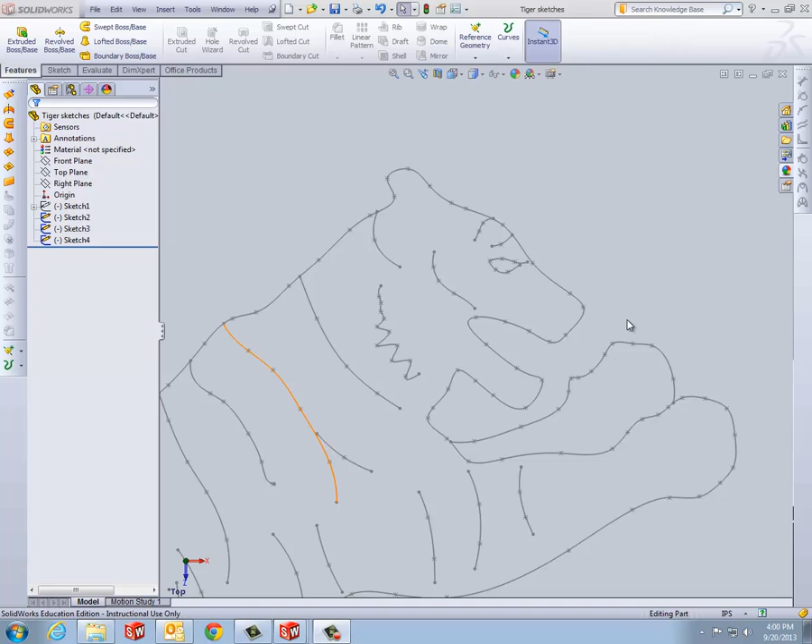Now that I've got a scary looking head on this tiger, I'd like to extrude this whole tiger body, but before I do, I'm going to do a few extra additional steps here. I want to extrude the main body out, probably 100 thou, but this background, his paw back here, I'd like to extrude about 30 thousandths.

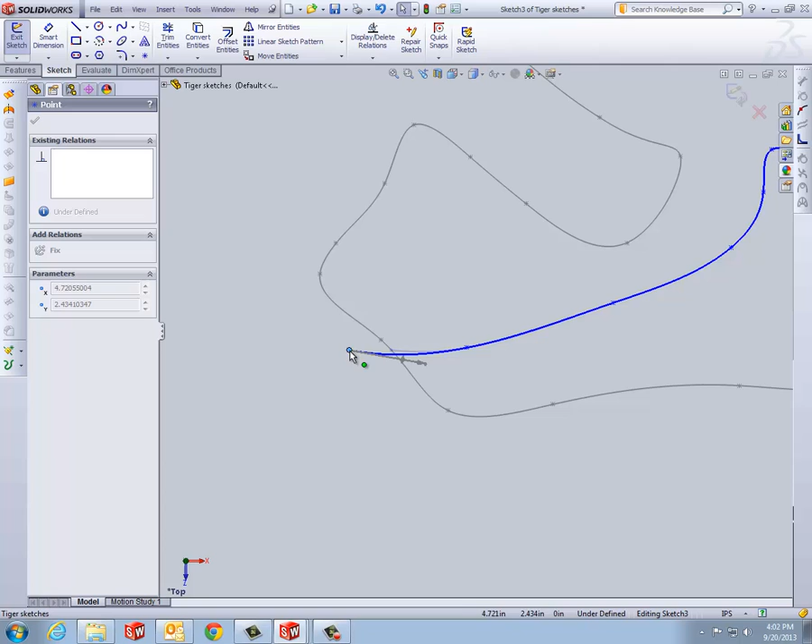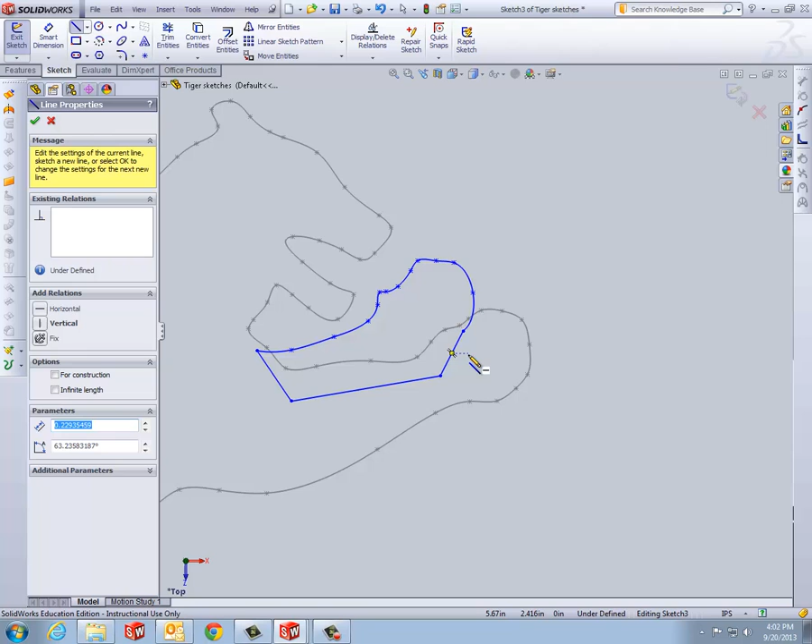So I'm going to tell it sketch 3, pull this in a little ways, pull this in a little ways, make sure I have a nice tight looking paw. I'll close that up, and over here, let's try it without pulling. I'm going to close that open loop also. Doesn't have to be pretty.

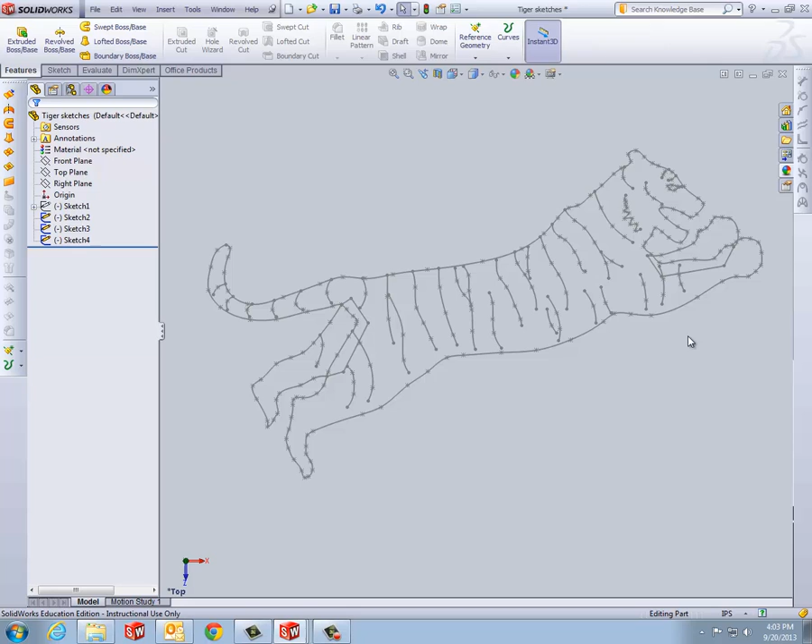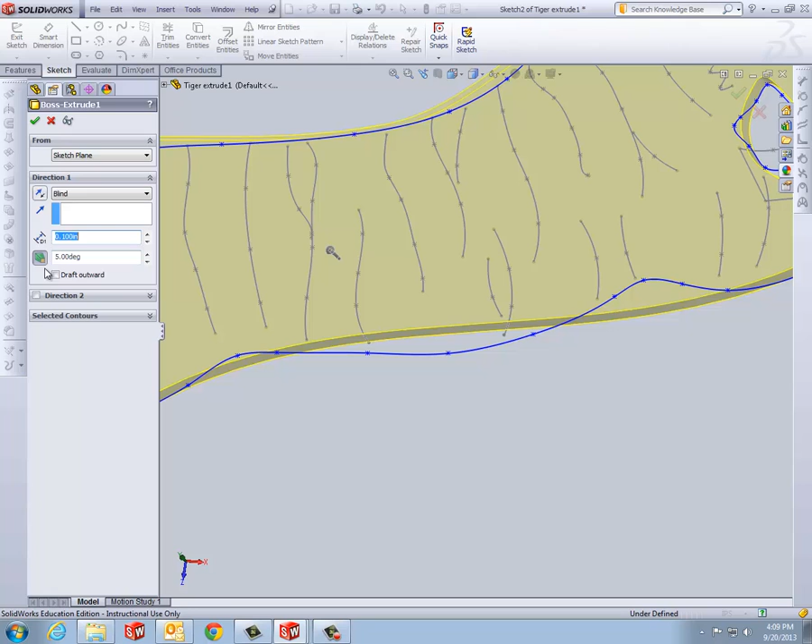Okay, now let's have some fun with this guy. I think we've done all our preliminary work that we need to do here. Let's take sketch 2 and come up to extruded boss base. Let's extrude him up - yeah, I like their suggestion of 100 thousandths. That's pretty good. So he's extruded out now 100 thousandths of an inch. So now I've got his head.

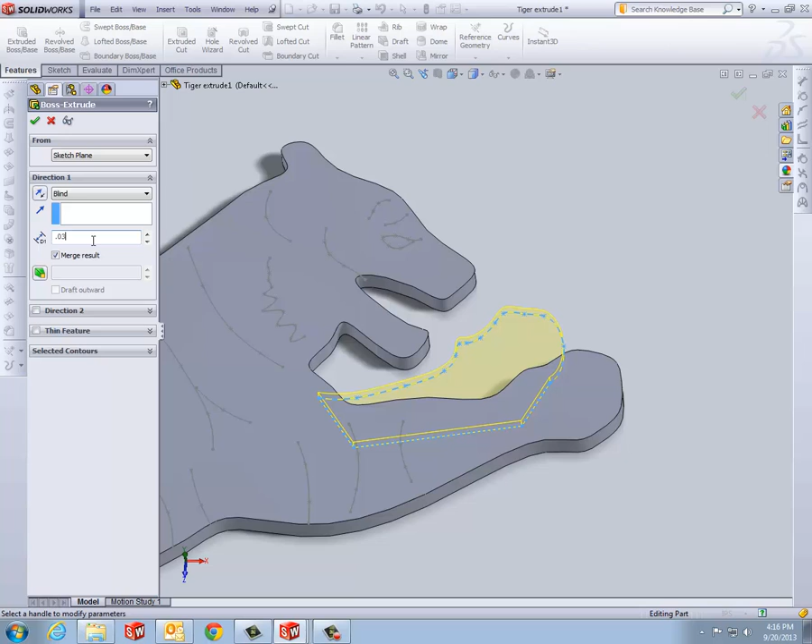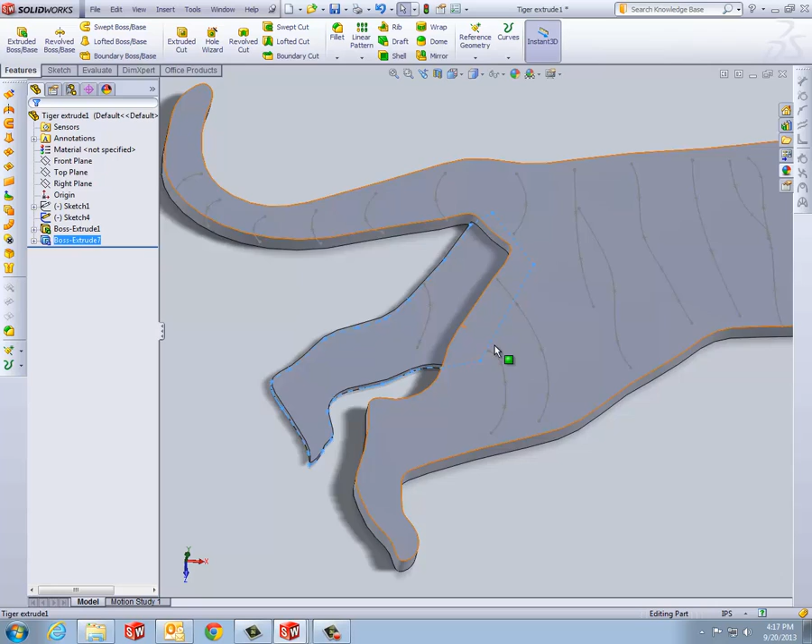Now let's extrude sketch 3, and I only want to extrude it about - not very much. If I extrude it very far, then I'm going to run into troubles later when I try to fillet this outside edge. So I've got it extruded. It's got some relief there. His rear leg is here, but it's definitely in the background.

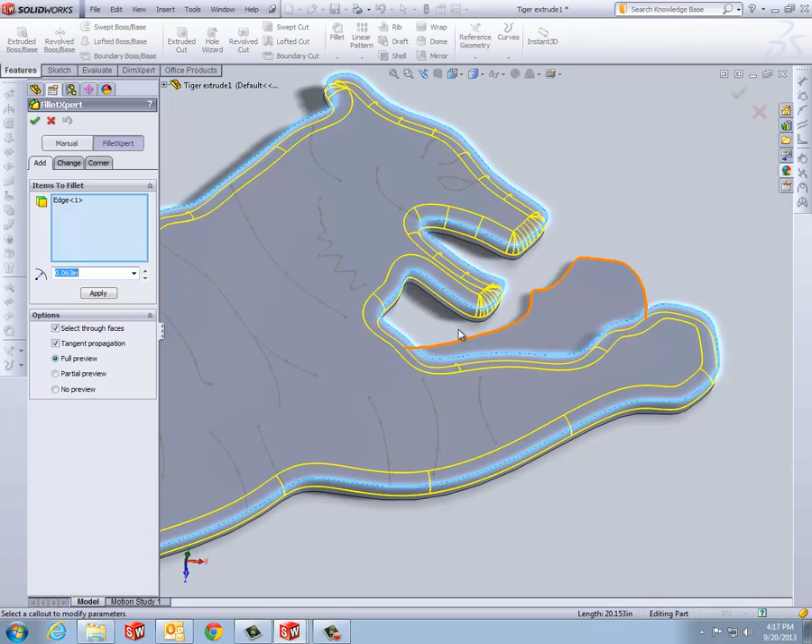Now I'm going to grab this exterior and try to fillet that. I'm going to put in a 063 fillet, and it looks like it's going to do it. I think it'll do it as long as this secondary extrusion down here doesn't get up into the fillet. If this gets up into the fillet, then we're going to have some problems, and it's not going to like to fillet it. There.

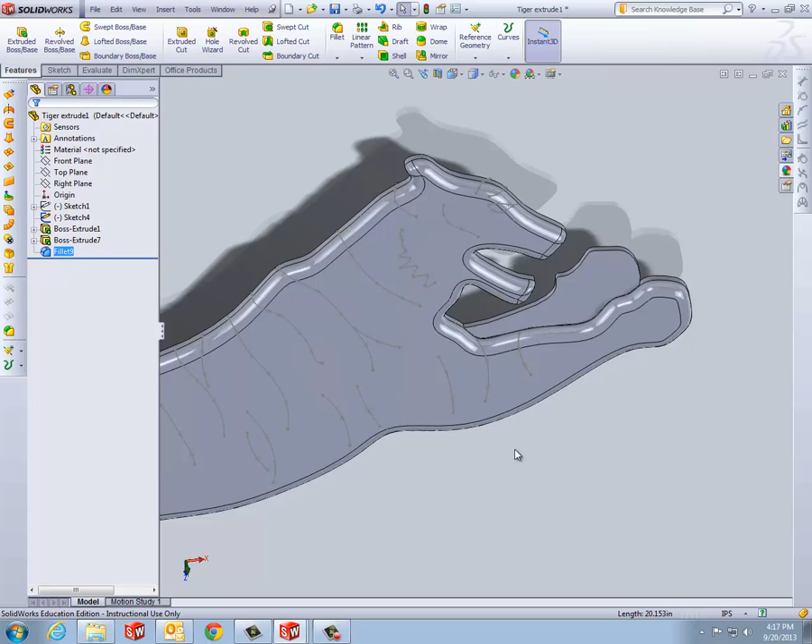So I've got my tiger with legs. Good time to save.

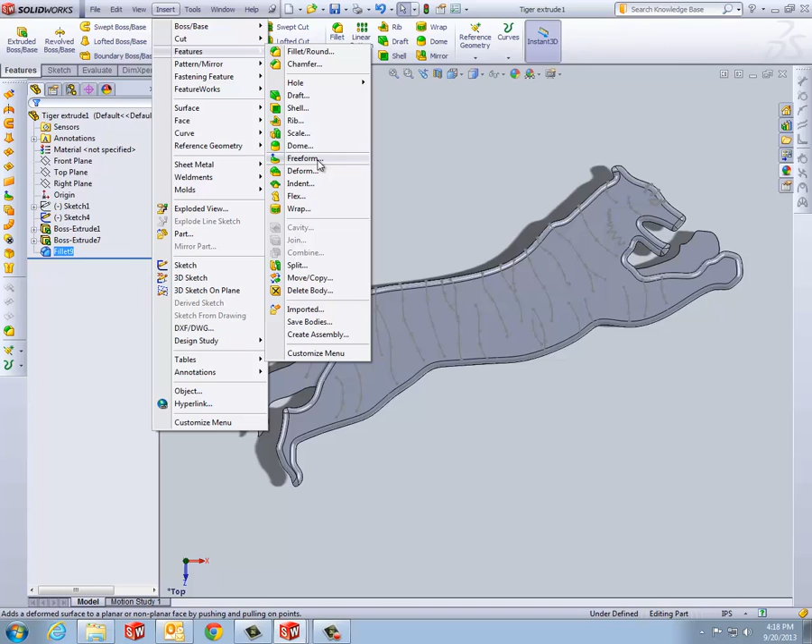What I'm going to do is insert a feature, and I'm going to go to the Freeform Features Manager. And what that lets me do is select the face that I'm going to mess with. It puts this grid on here. The grid settings can be changed to kind of see it a little bit better. You can grab this arrow and tilt the grid so it lines up a little bit better with the axis of my tiger.

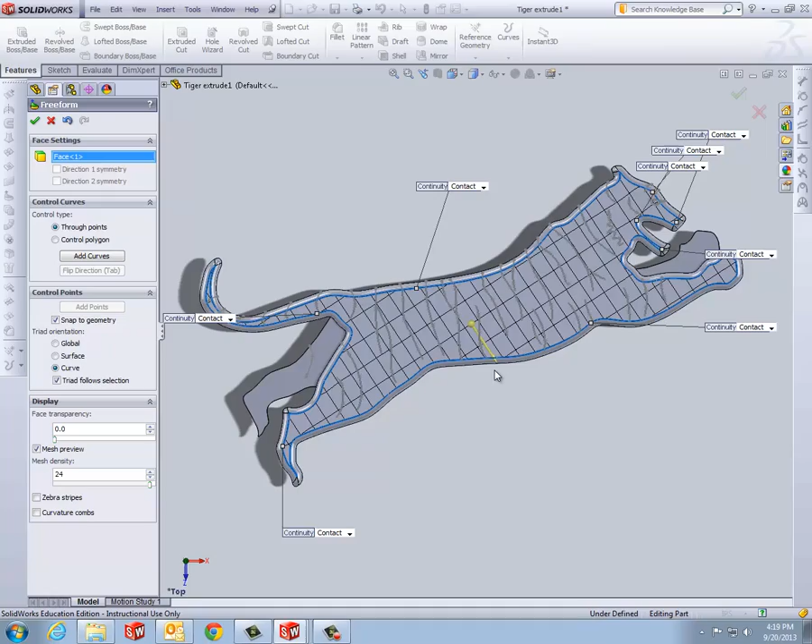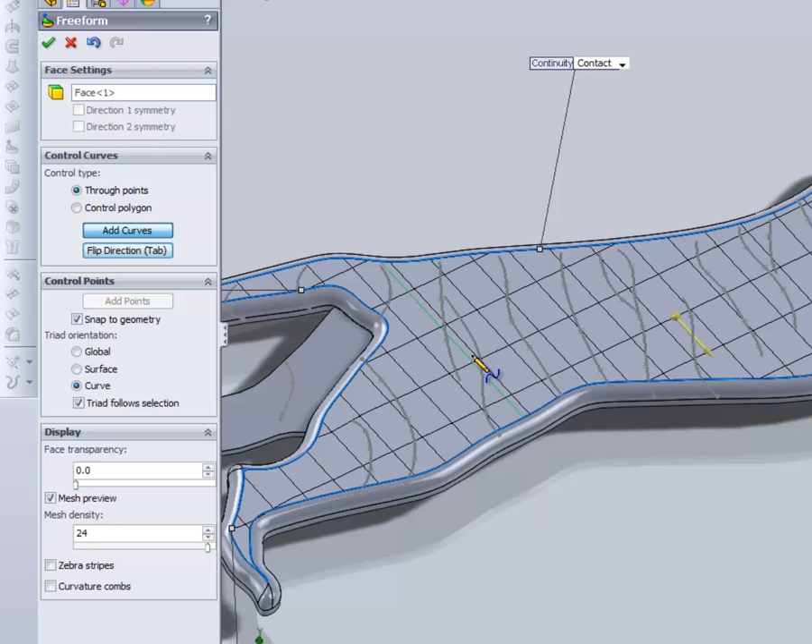And then we need to add curves. What I'm going to do is just do a quick one here. Do you see this green line that's forming out, it's very, very light - I hope you're able to see it. I'm actually going to hit the tab button, that's this flip directions tab. If I hit that, now when I come out here, my green line is running across his body, kind of cross grain. So what I'm going to do is place this right in here on this back leg.

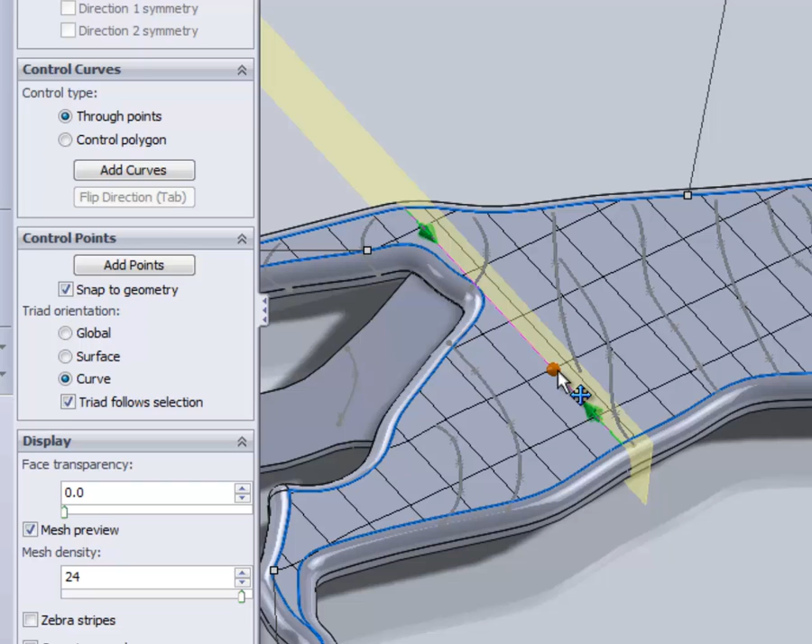Now I've got a control curve there, and I'm going to say add points to it. If I come out here, notice my cursor - you can't add points, then all of a sudden when I get on this curve it says, oh yeah, you can add points there. If I add a point there, what I'm doing is adding a push-pull point. And if I come over and click on add points again, I'm no longer adding. Now I can, when I wave it over this green dot and pull on it up this arrow, I'm actually pooching out his leg here.

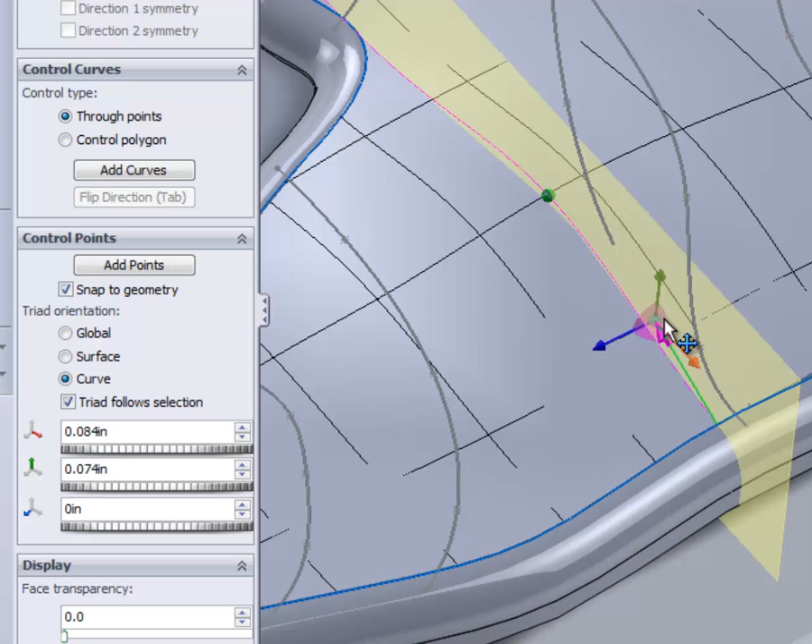I've actually pulled on - if you pushed it in, it's just like pushing your finger into clay. You can depress areas or you can pull them up. And you even have the sliders working for you. I'm going to pull him up 80 thousandths of an inch. This one I think we can leave at 0. And I'm going to get in here and actually tug on the arrowhead that's on the end of this. It's much like manipulating a spline, only it's control points for surfaces.

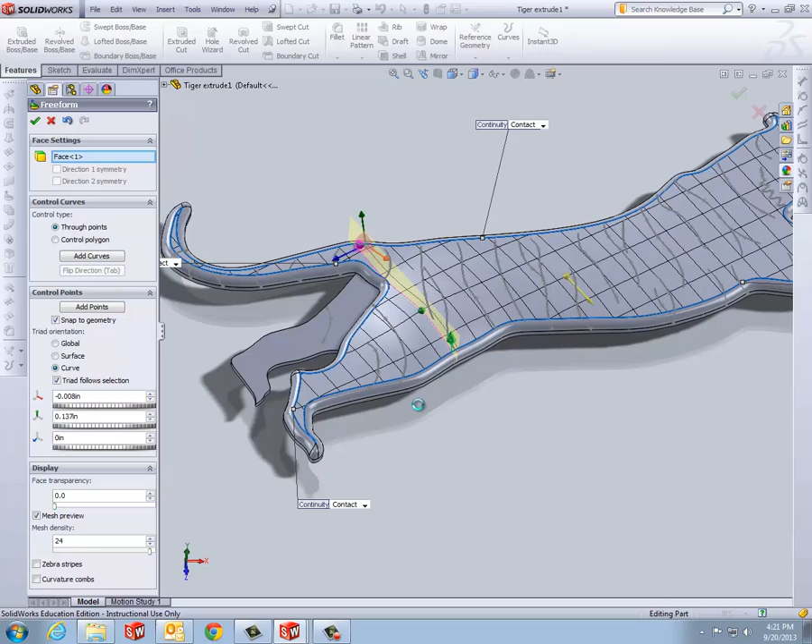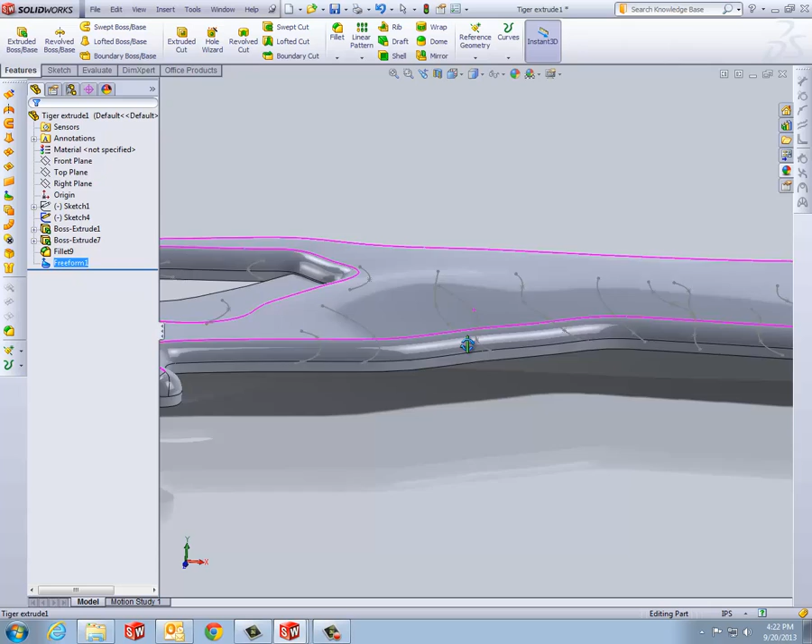Let's see what that did to it. By the way, when you start doing freeform surfaces, you really start burning up processor speed. Okay, it's done processing. Let's roll that around and see if we can see the result. Yeah, pooched that area up and stretched it actually across much of the rest of the body here. I'm going to change it brown and see if we can actually see it maybe a little bit better if it's some sort of chocolatey brown color.

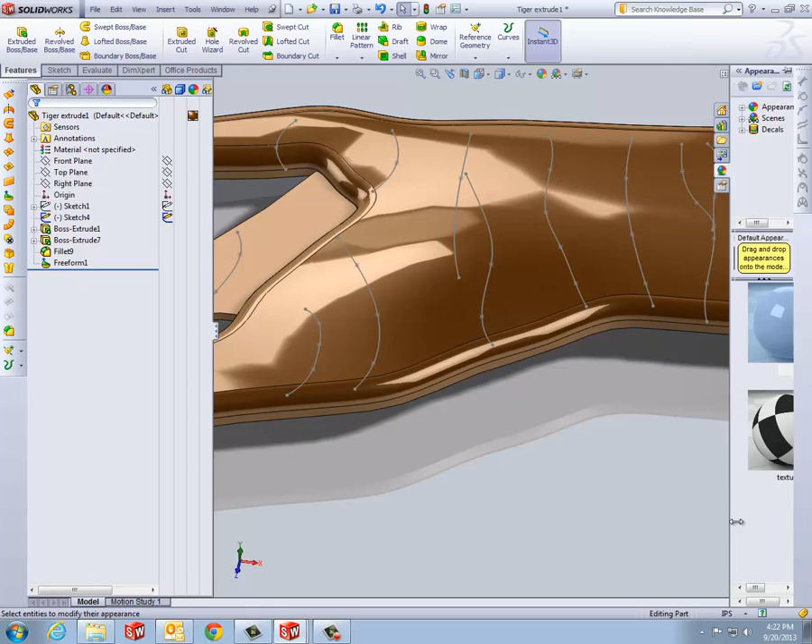And it's pretty shiny. It's a little hard to tell.

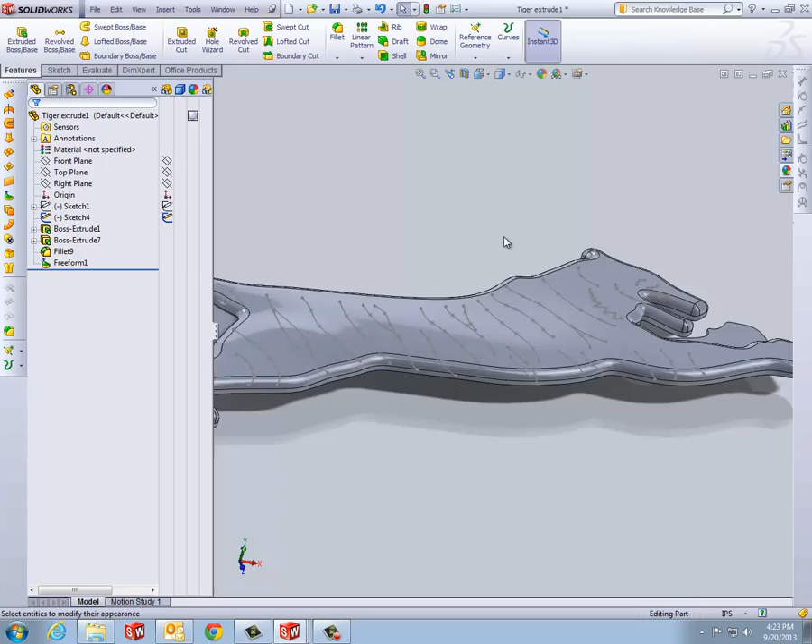I think he needs some more freeform up here in his shoulders, maybe on his head, this front leg. So let's go into freeform and edit that.

And I'm going to add some curves. I think another curve in here about by his belly, and then another curve up here, this shoulder area. Let's give him some real good shoulder development. Maybe a little something in his head area here, and possibly along his back.

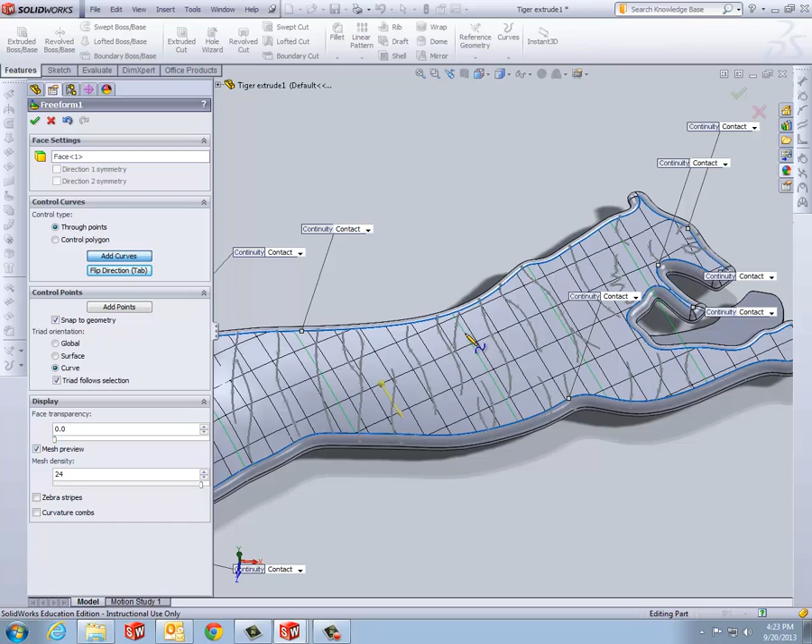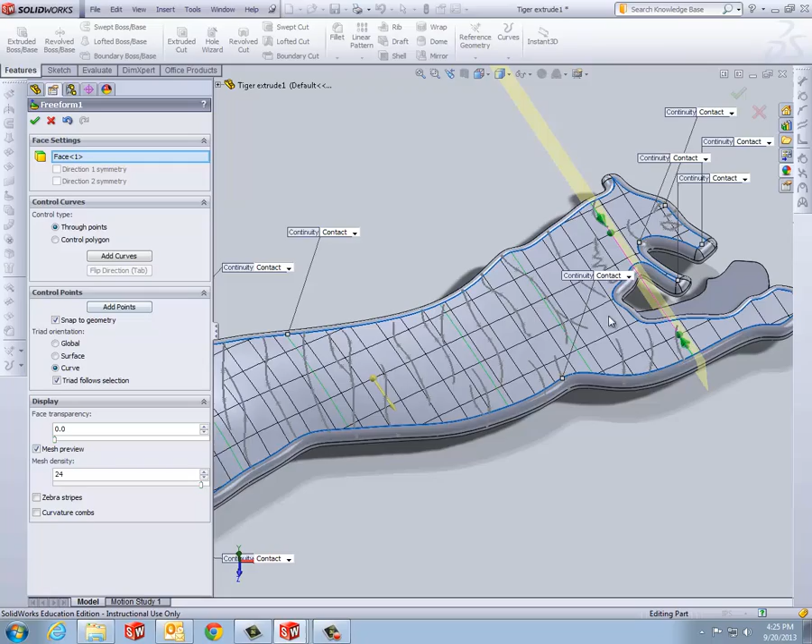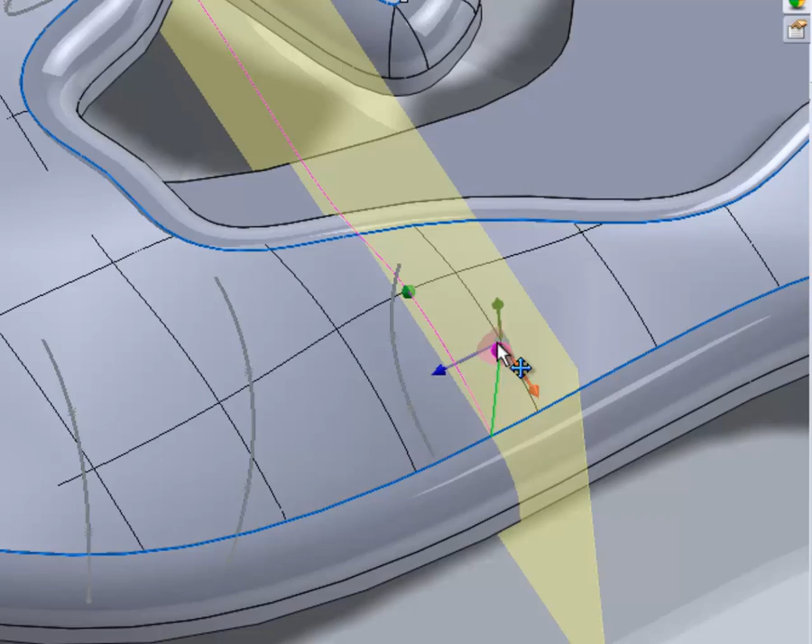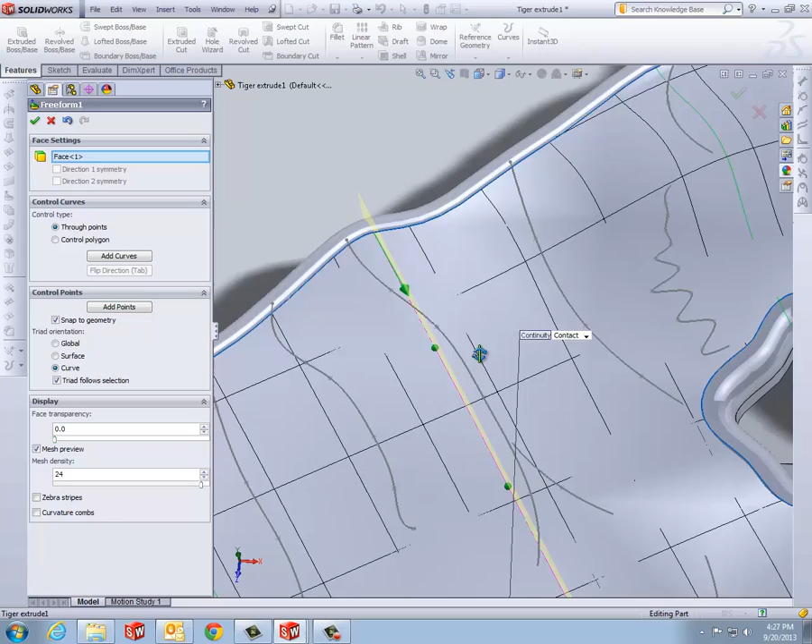Let's pump up the shoulder a little bit here. Bit on his back - well, maybe we'll leave his back sunken in. They have kind of a little hump back there. We'll give him some really good shoulder development down into his leg.

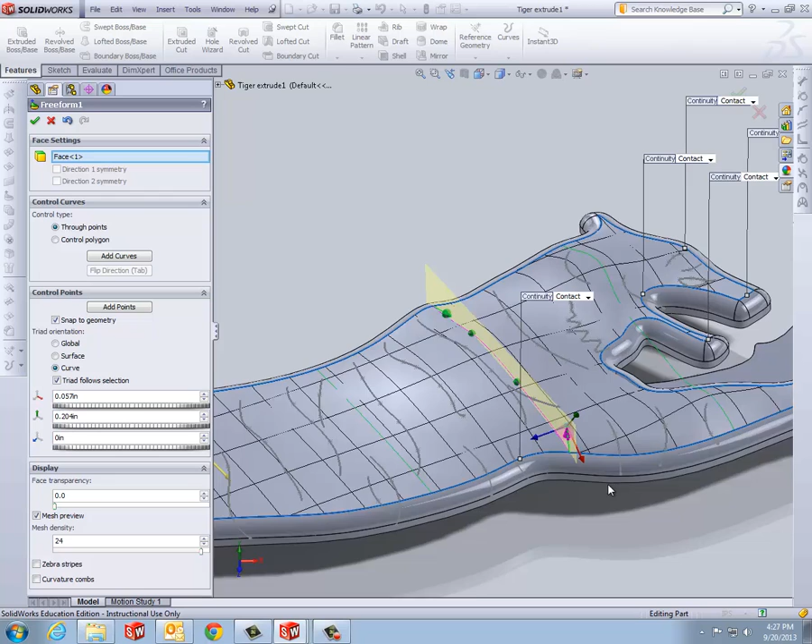A little warning here, you can spend hours pulling on these points, making everything look right, and you can get some amazing results. Okay, I'm going to agree to that, and let's see what happens.

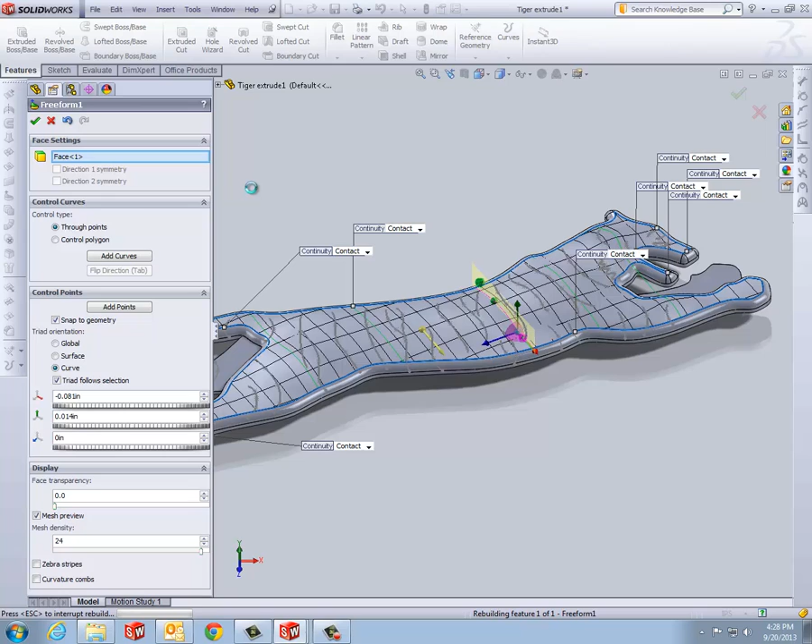I'm going to turn off the tiger stripes just for clarity here. Whoops, I don't want to edit that. I just want to shut off visibility. There.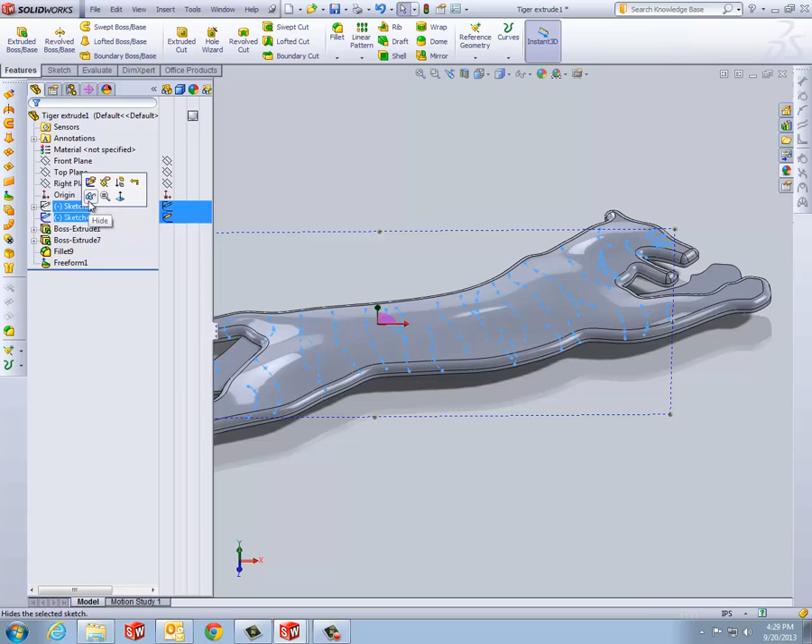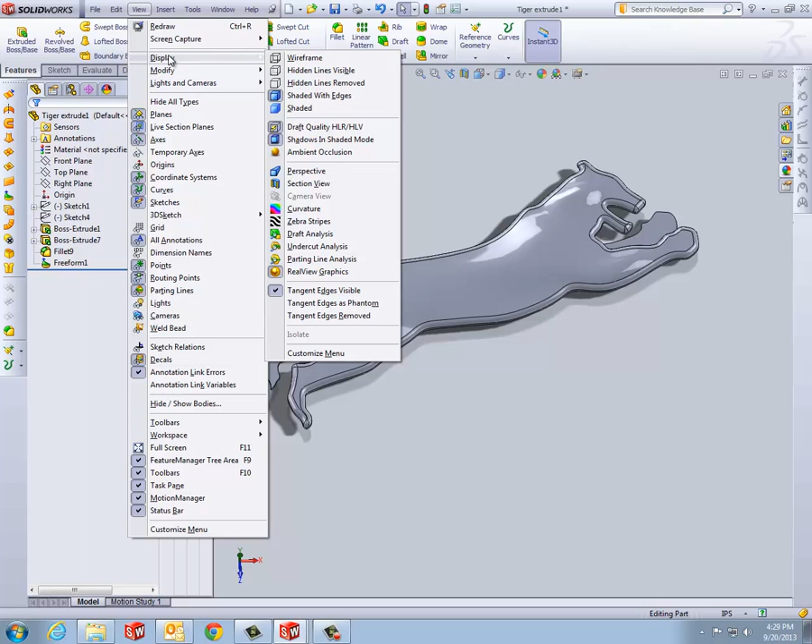Now to help me see these curves, I'm going to add in a display setting. So you go to View, Display, and I'm going to add zebra stripes to my tiger. Zebra stripes help me see these curves like this fillet. As I rotate him around, my zebra stripes move.

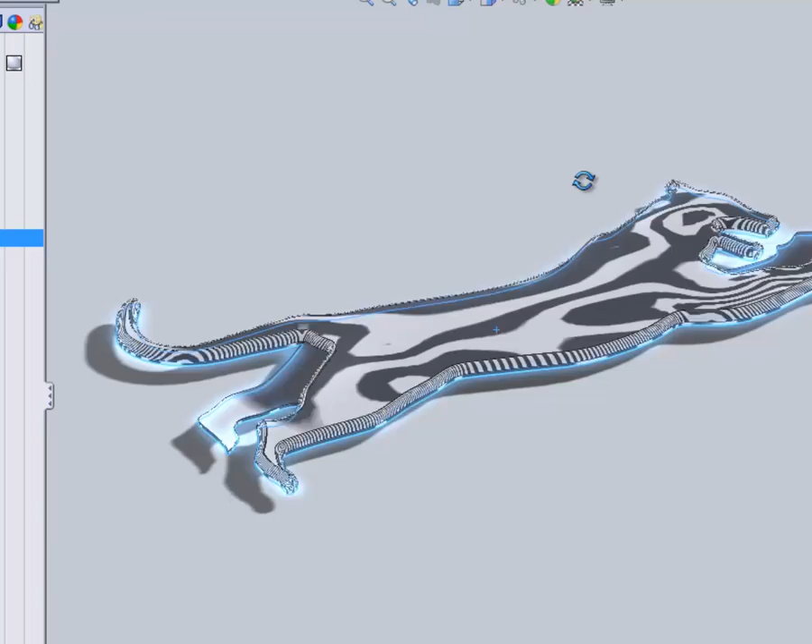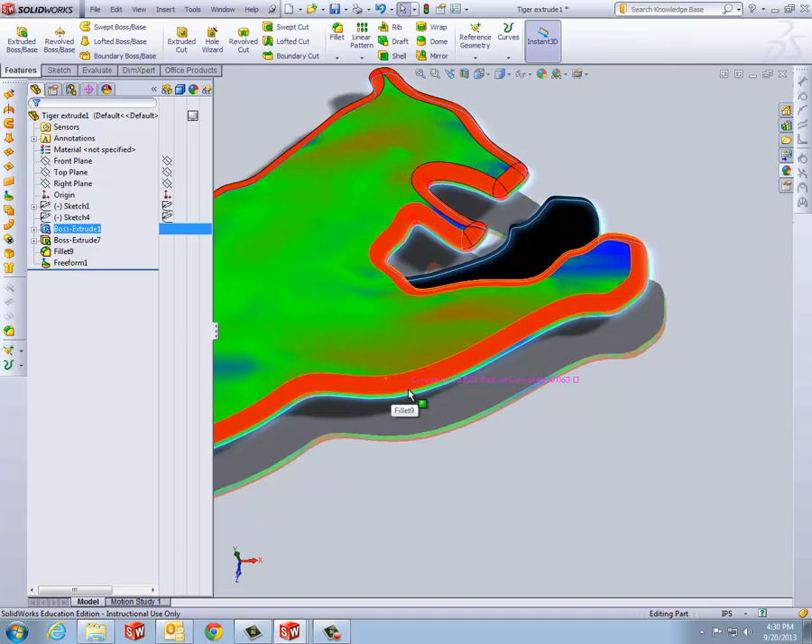It helps me see where my curves are sometimes. Another thing you can do is if you shut off zebra stripes and then turn on curvature, anything with a red is very curved, blue is not so much, black is completely flat. And wherever you move your mouse on here, you'll also get a curvature reading - a radius of curvature.

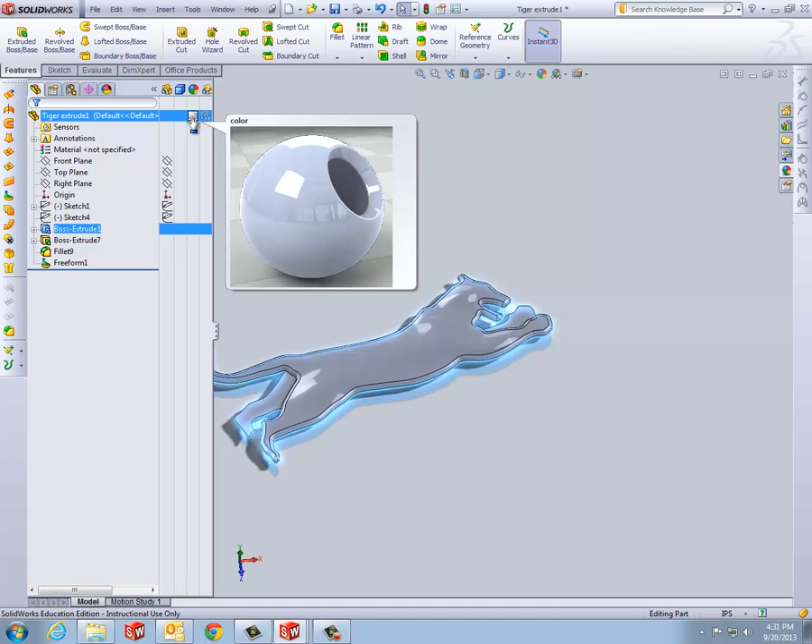The other thing I found that helps is turn it a little bit different color. So I'm going to get in here and go Color, Appearance. Let's give him a brown color. So now we have our chocolate tiger.

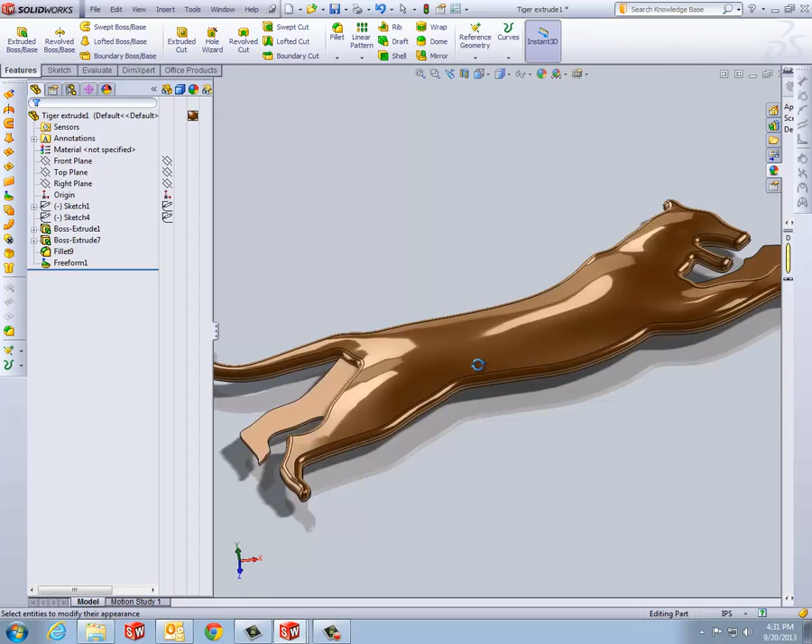I'll let you pump up his tail maybe a little bit, or it's really looking pretty good here. Don't get too carried away with the freeform tool - it will really burn up processor time.

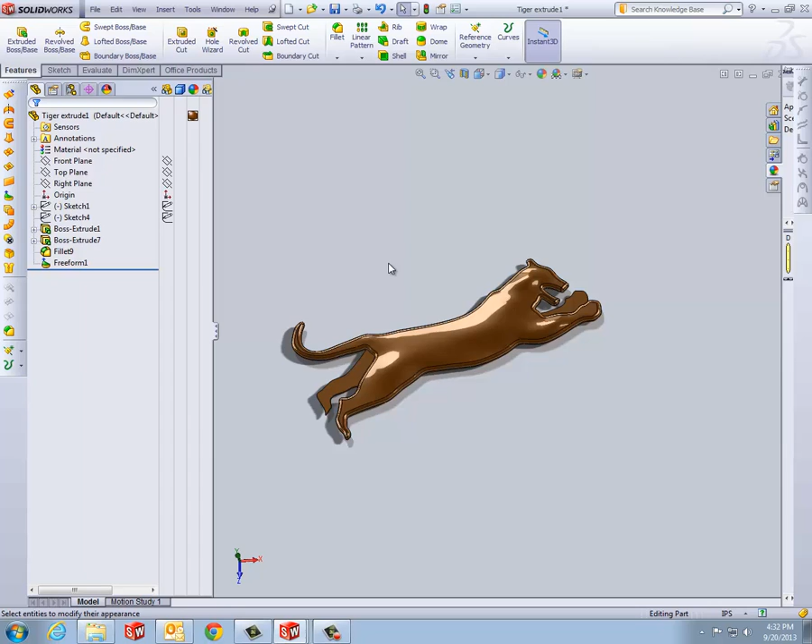And I think we'll turn him into his own candy bar here. So let's open up a new sketch. This would work, but his tail will break off a lot.

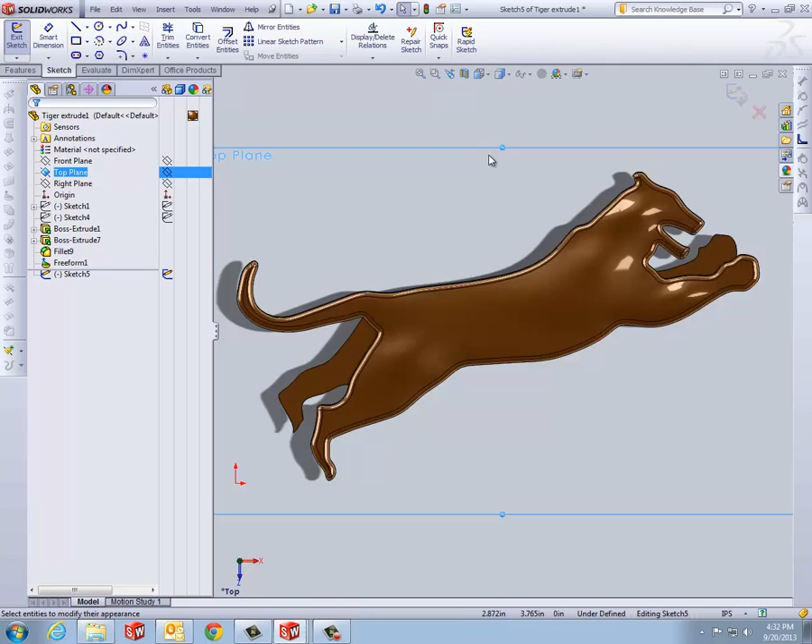And let's do a rectangle. I believe I'll smart dimension him about 3.5. And I think let's try a little less than 7 - so 6.75.

Yeah, 3.5's a little small. We better give us a little more room here. Let's do 3.75. We've got a little room on his tail. The 6 - let's back that off to 6.5.

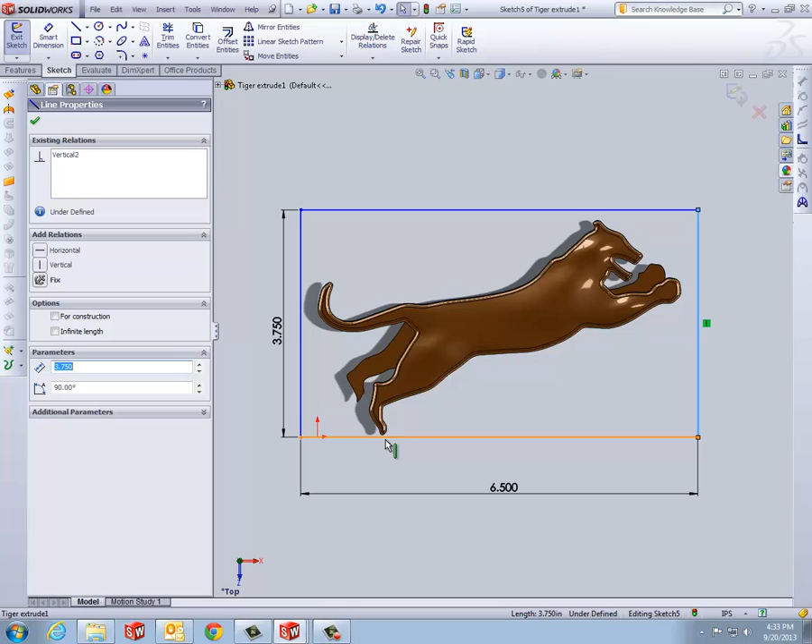Position it where you want it. A little room on his paw, a little room on his tail. His ears got good clearance, and his little toes down here are on the bar, so I think I like that.

We'll get this point, and we'll say anchor that point. That will fix that point in space.

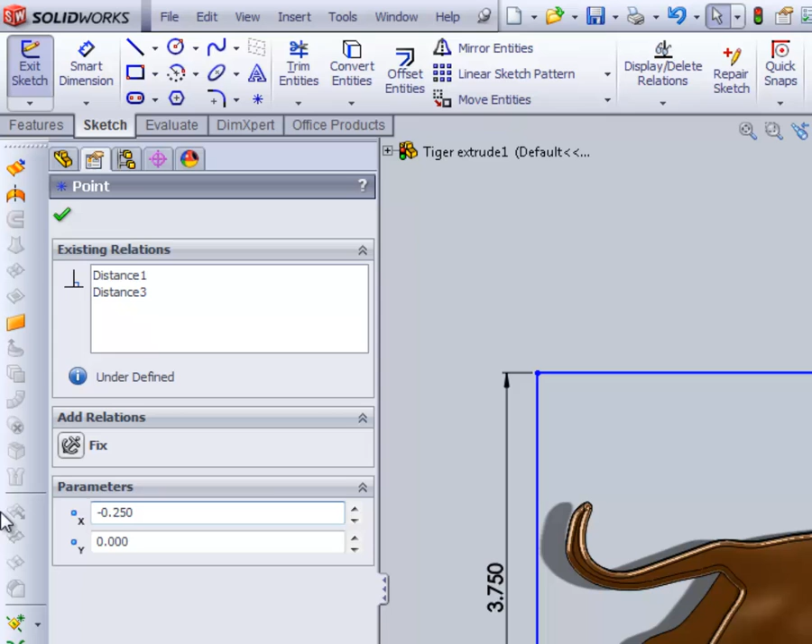Actually, I'm going to remove that. I'm going to tell it, let's make this a 0. Well, we put it at -1/4 inch, -0.25. Still got good clearances all the way around. Now we'll fix it.

We've got dimensions that make sense and a location that makes sense. And I can take that sketch, extrude it in the other direction.

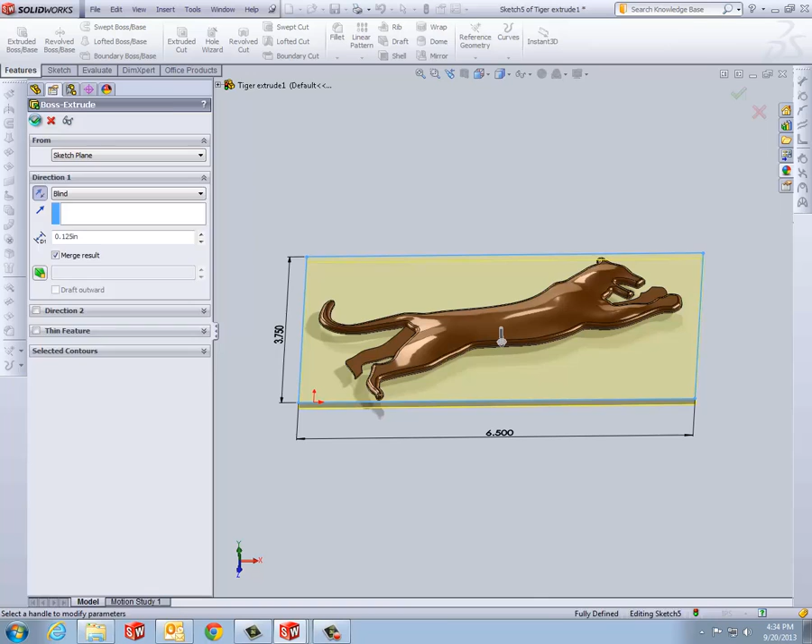If we extrude him 125 thousandths of an inch - let's make it nice thick chocolate, 1/8 inch. And we have our tiger chocolate bar with plenty of room for text.

We'll try and come back later and put some stripes in. We may have to add stripes in before we do the mold compound. We'll have to see where this goes. But that is a good looking tiger. Time to save.